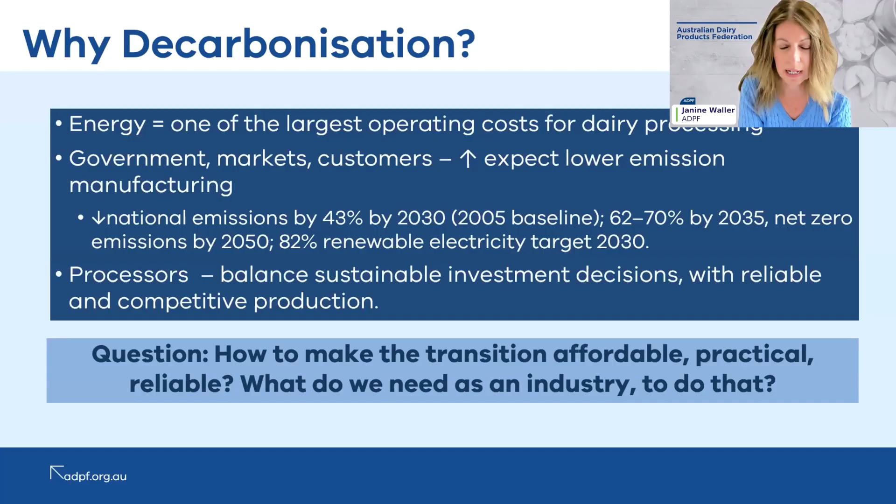Next slide please. Obviously decarbonisation is all around how do we reduce our greenhouse gas emissions. Two areas we look at: one is how do we improve our energy efficiency through our processes, and the second is how do we adopt some of those low emission technologies.

So the path we went down - the whole premise of this decarbonisation pathway - was we needed to provide an evidence base. We wanted to look at all of the assets we have, understand which of those were getting close to end of life, and then support with that transition.

But then we wanted to overlay that with what technology is currently available, whether it's here or globally, what are the barriers to actually implementing that technology, and overlay that with opportunities. We wanted to wrap all of that into what our policy priorities are.

So we take all of that information around the asset inventory assessment, we look at our technologies, the barriers, the opportunities. How do we then craft that into what our priorities are, both from an individual member perspective, but then what we can take carriage of from an advocacy perspective on a whole of processing sector perspective.

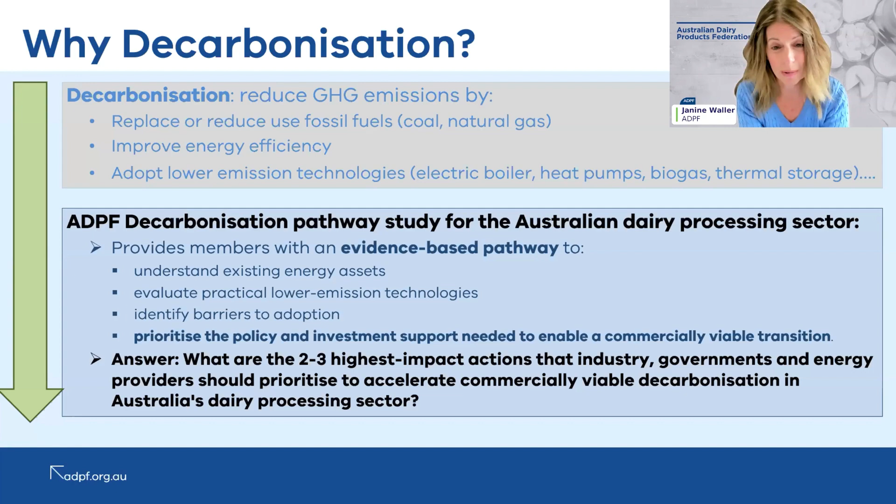And that's what we will share with you now. Next slide. Before I do that, our project partners are DETA Consulting, and this was also made possible with funding from the Australian Industry Renewable Heat Accelerator. So I'll pass over to you now, Bryce.

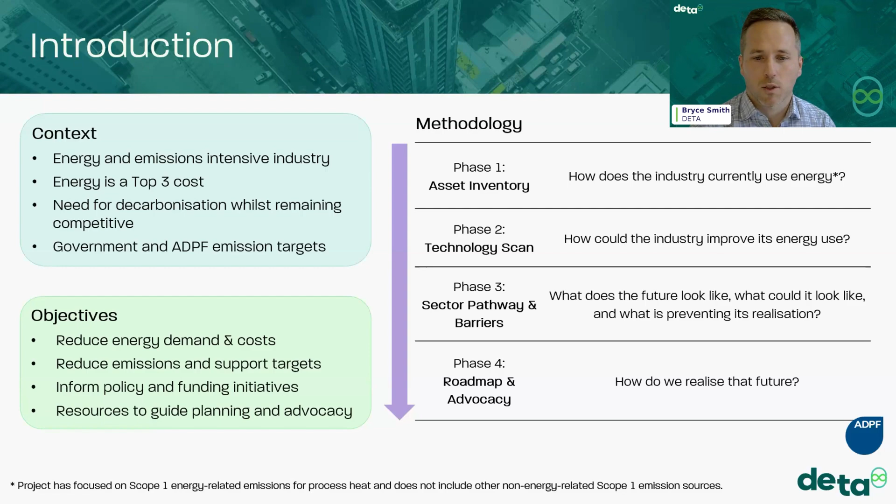So that was the methodology, starting with the asset inventory. No real surprises - fossil fuels contribute the majority of energy for sites, about a 70-30 split between fossil fuels and electricity. But because of Australia's grid, the emissions contribution is actually 60-40 the other way, where electricity emissions contribute the majority of emissions currently. There's some nuance around how we think about that in terms of a roadmap and pathway for the industry.

No surprises around where the dairy sites are - the majority are in Victoria, so that's going to be a focus for the industry. But it was really interesting to see there's a real broad spread of asset ages and asset capacities. I think that means there's no large group of assets coming to end of life - it's an ongoing thing, and it means support and thinking about how to decarb is an ongoing challenge. It's also worth highlighting that some of the ages of assets are getting up there, and that speaks to some of the challenges we'll talk about, where these businesses are really trying to remain cost competitive, make the most of their assets, and face some of those capital constraints.

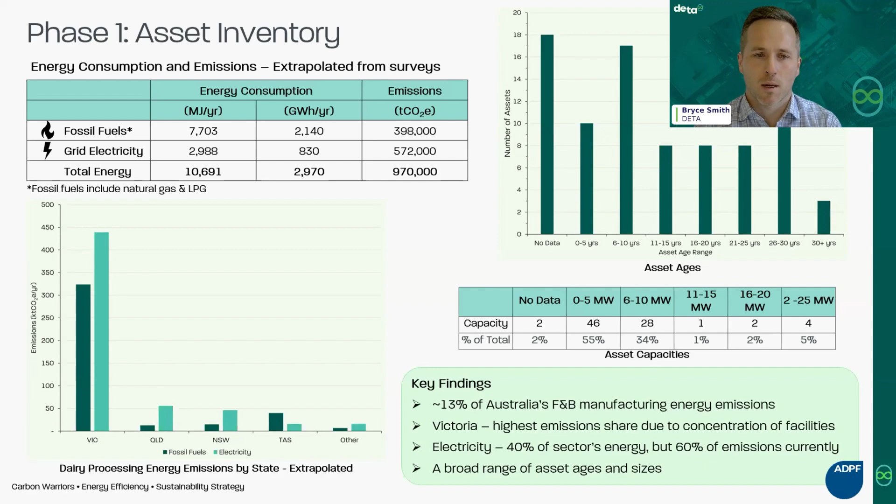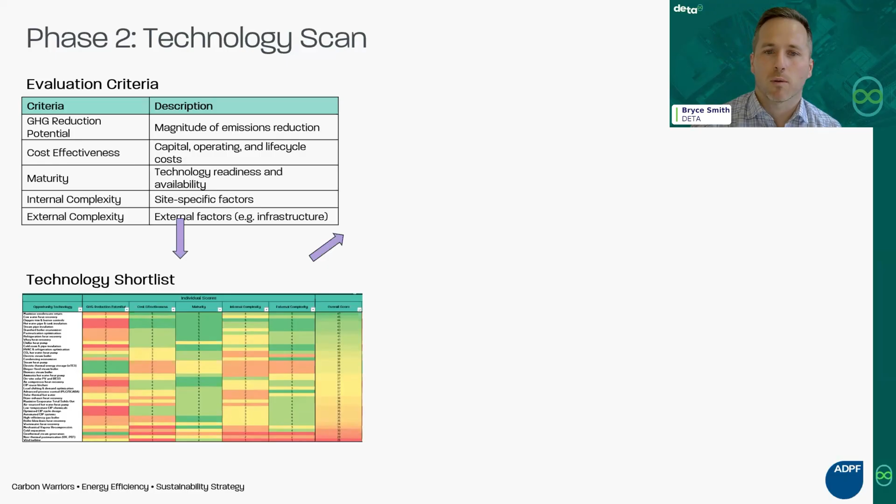Thinking about how the industry could improve its energy usage, we wanted to engage with members to understand what makes projects attractive for them. So we got input on developing some evaluation criteria and selecting a technology and opportunities shortlist. What we came up with was a top 20 technologies list, broadly split into the demand side - optimizing existing assets, reducing energy, improving energy efficiency - and the supply side, how do we go about generating heat and generating electricity for the site.

This reinforces a little bit of what Kyle was highlighting - the technology is there, and these technologies and opportunities are being implemented. Maybe not so much in Australia, but definitely internationally and across New Zealand they exist and they're happening. So there is no single silver bullet, but there are real options out there.

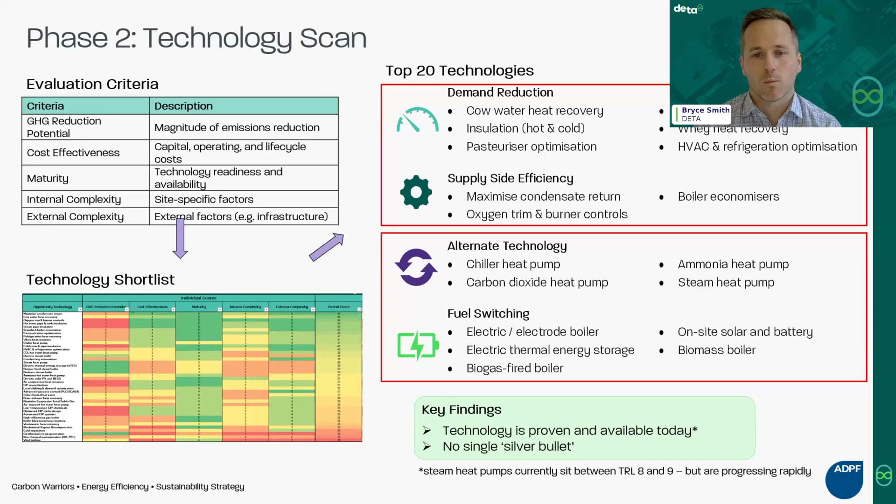As part of the study, we also pulled together some one-pagers, and the idea behind that was providing a really good resource for ADPF members and the industry to refer to in the future. So that's also a part of the report.

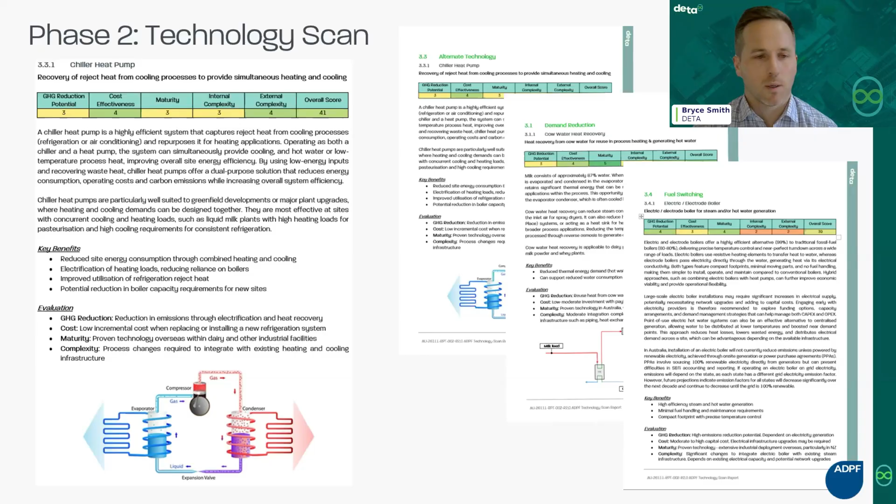Now, before we get into the pathway and what that future could look like, it's worth highlighting some of the barriers we got direct feedback from members on. For those in the industry and working across industries, we've seen and heard all of these before. Given that all of this has come direct from industry and members of different sizes, this should really add to some of that feedback, which I think is starting to turn into a cacophony of voices saying there are some real challenges around achieving decarb.

So there are some specific nuances for the dairy industry, but highlighting them: electrical capacity, both on-site and networks; those financial barriers, the CapEx challenges, but then also the OpEx challenges. In New Zealand, Kyle highlighted that there's actually some benefit sometimes for using electricity - there is a cost competitive aspect there. In Australia, that is not necessarily always the case, so there's a challenge around that.

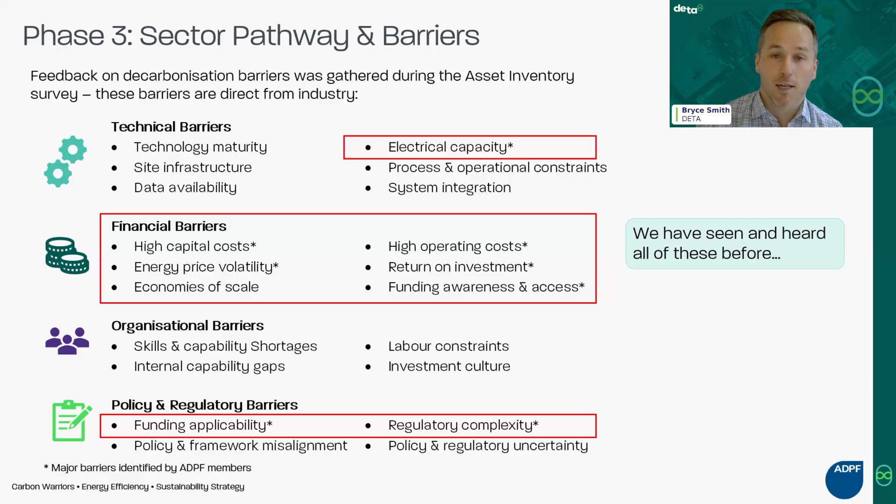And then also talking about the dairy industry, it has an annual cycle. It's very focused on being cost competitive, which means resources are not necessarily always there to chase the funding - which you blink and you miss it - or really develop how to implement some of these initiatives, which are outside of business BAU in a highly regulated and high hygiene processing environment. So those are the barriers.

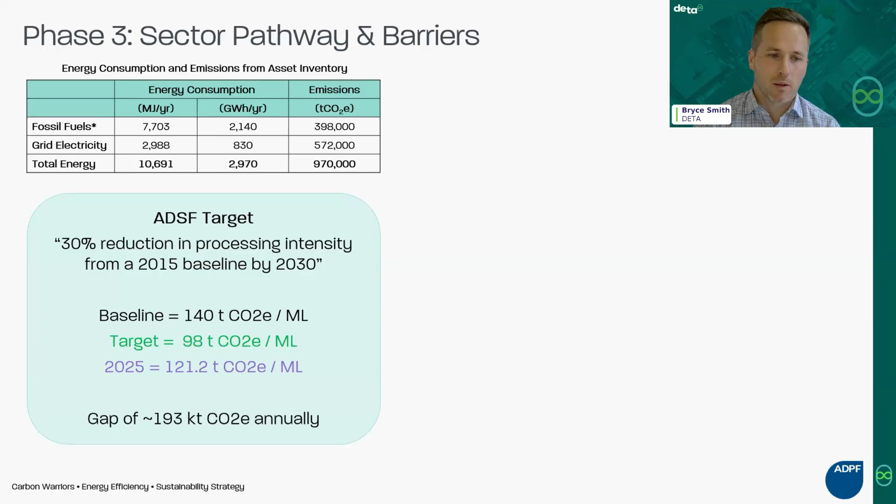Talking about some specific targets and a pathway, the ADPF and the Australian Dairy Sustainability Framework have a target for dairy processing in 2030 to hit a certain processing intensity. At the moment the industry has made really good progress, but there is a gap there - about 200,000 tonnes annually, give or take, of carbon emissions. I'll run through the graph in a bit more detail in a second, but highlighting again that a majority of emissions come from grid electricity at the moment, and there are different projections out there around how Australia's grid might decarbonise. That's definitely going to play a role in the industry decarbing and hitting its targets.

But I think there are some different scenarios around that, and the green line on this graph is kind of the current projection, or at least the 2025 projection from DCCEEW.

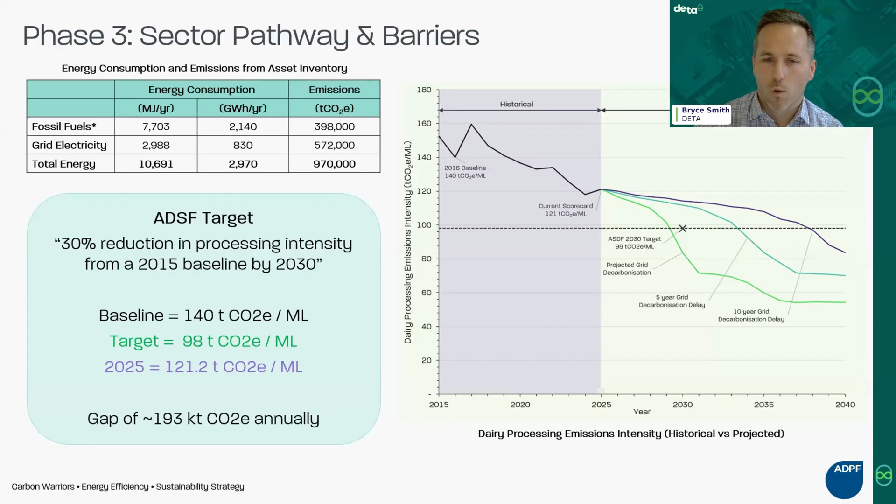I think what we see is that projections, and this is what these two graphs are showing, have consistently not been realised. And even if you do electrify, or go to biomass, the spark gap between the emissions intensity of burning natural gas on site versus the grid means that electrifying is not an answer in itself.

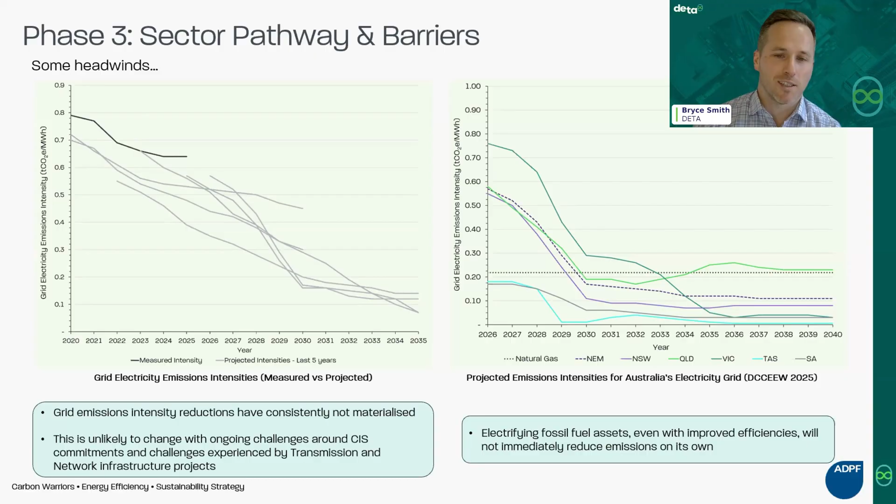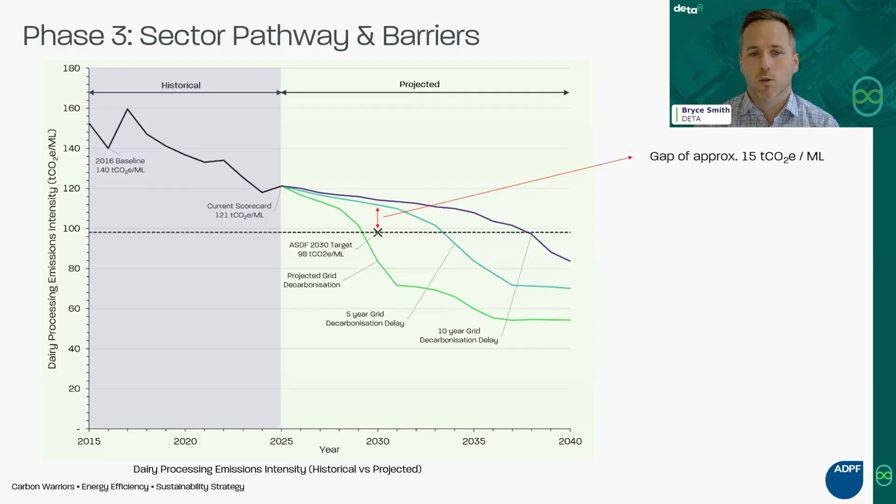So thinking about different scenarios, we mapped out some different pathways, and looking at the teal line now, we think there's about a 15-tonne CO2 per million litres of milk processed gap that the industry will need to solve to hit its 2030 target. So how do we close that?

Well, it's not rocket science. This has all been done and tried before, but we think that optimizing existing assets on site and using some of the technologies and opportunities identified in the technology scan can contribute about 40% of that abatement. And thinking about the large group of assets possibly nearing end of life, if we can electrify these or move them to biomass, backed with the right supply agreements, that can deliver 60% of that abatement.

But the barriers really do show that this is not going to happen by itself, and there needs to be some real support and capability built up around that.

And then it would be remiss to not also talk about renewable generation, and say batteries and solar is a big topic in Australia. I think there's going to be more developments and support in that space, which might mean it is a useful means to reduce emissions whilst the industry prepares different initiatives.

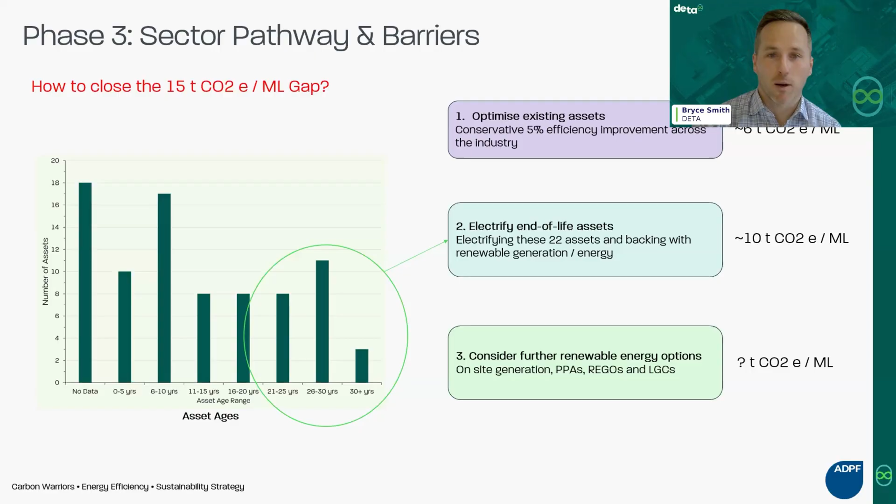So jumping back to a high level, we really see that there are three phases of decarbonisation for the industry. And that first phase, and Kyle even said it before, this is not a 1 or 2 year journey, it is a long-term journey. So that first phase is about building a really good foundation for future initiatives and business decision making, and optimizing the roadmap, and data collection, metering, all that stuff is really important.

And then it's about picking that low-hanging fruit, getting those quick wins banked, and starting to build business capability, capacity, and confidence that the business can deliver these initiatives before you then go and deliver those real strategic initiatives. So that's from a high level, that's kind of how we see things playing out.

And then the last piece of work we did as part of the study is we looked at, because there is policy and funding in Australia, what's out there at the moment from a dairy processing perspective. We think there is funding out there, but quite often it's focused on an individual technology or process. And again, highlighting that lots of these processing sites are complicated, lots of systems are tied together, with lots of interdependencies.